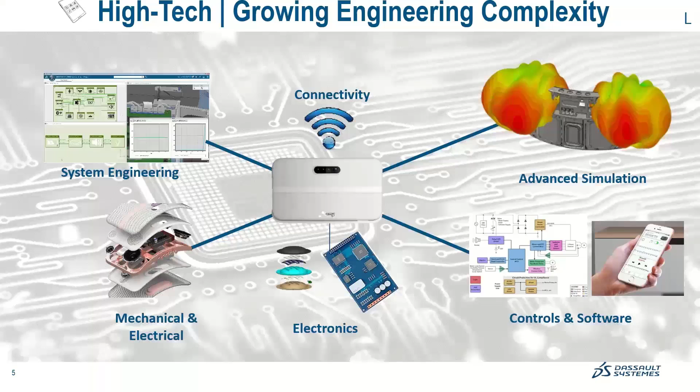Lou worked with the SolidWorks and mechanical guys over the years, and advanced simulation. The high tech is in engineering, the complexity, the model-based engineering and system engineering, systems of systems, making sure that you have all your I's dotted and your T's crossed when it comes to all these different disparate processes. You really need to have your finger on the control and be able to create these digital twins and do this simulation virtually instead of in the lab. You could be there simulating and changing one variable at a time.

And with that said, there's a whole process when it comes to product development, engineering, multidiscipline, governance, product requirements. I mean, who sets the product requirements? Well, typically marketing, sales. It could be a product requirement from the government that says, okay, you have to have this box, it has to do that, it has to fit on this airframe. It could be a commercial design, industrial concept, intellectual property that you're putting into a chip and creating a new product.

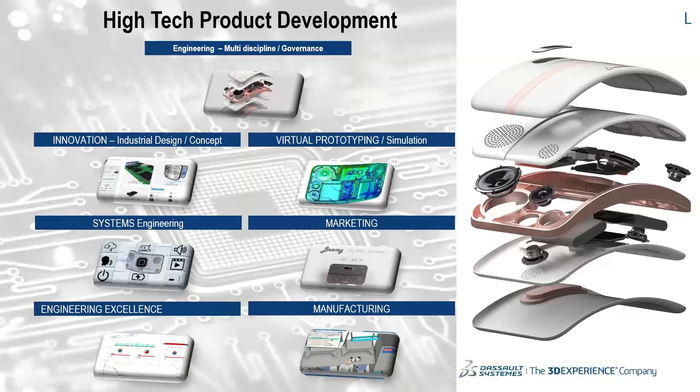Basically, creating something new like this. This is a concept product that Dassault came up with, this Beamy. It's really just a cool Bluetooth speaker that kind of sits up by itself, and it integrates the full plethora of mechanical system, software, advanced packaging, because some of these packages and printed circuit boards may be curved or rounded. Then following that all the way in through manufacturing and making sure that this is producible, being able to control the manufacturing machines, the industrial equipment, and with being able to produce this, whether it's onshore or offshore. That ability to collaborate with those guys is really, really super important.

This is kind of a view, if you will, of the disparate processes and software that are out there today. I mean, this is just real life. You've got Microsoft Office, you've got SolidWorks for CAD. You might have Cadence, you might have Altium, Mentor, any one of those ECAD systems there. And how do you manage the projects? Use Jira. We use Slack at one of the companies that I work for. So just an interesting view of this.

And working for 20 years with Cadence, I can say I saw this over and over and over again. I also worked at Mentor for 6 years as well. So same thing, right, Lou?

Very well articulated, Ed. This is what we typically see at our customers - a real interesting snapshot when you see all these disparate systems. When we talk to the IT department and the IT heads, they just shake their heads and say, is there a better way?

That's where we introduce the 3D experience platform to consolidate all of this without losing it. A lot of companies have invested a lot of money in these platforms and products, and over time they need to improve. So we've created the ability, through the 3D experience platform, which is truly a platform that allows you to use your existing products today and then migrate over time as the company matures and grows into the 3D experience tool.

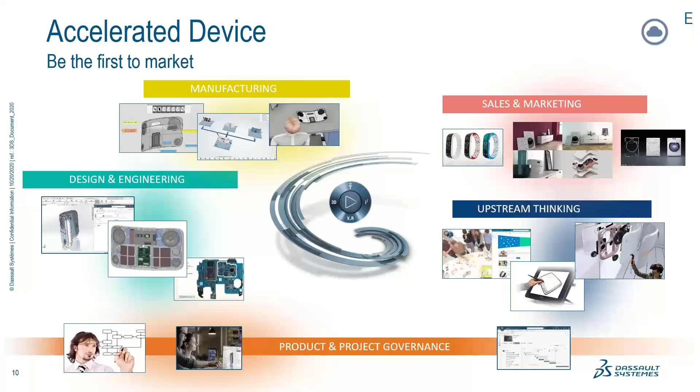Yeah, that's exciting. The manufacturing link to that, Lou. The other thing that's really cool is not only are they segmented that way, but if there's a specific industry, Dassault and EMA really focus on specific industries, so there's solution and product dashboards put together for specific industries. You can think of that as staying on task with what you're doing for that specific industry.

Look at the 3D Experience as more of a strategic way of doing things, because it's a very holistic view. We're not looking at individual tools, we call them authoring tools. It's really about using those authoring tools' data over and over again. That's what we're looking at, a holistic view.

It's nice that it's ECAD design authoring tools agnostic, or even MCAD agnostic too, right Lou? Because you've got Creo, you've got Solidworks, you've got whatever. As we go through this webinar, we'll show you some of the in-depth design tools and some of the tools that cross over from other suppliers.

I'm glad you mentioned that, Lou. The whole thing here is that it's a unified platform, and we're looking at a platform approach, taking a model-based engineering approach to the design.

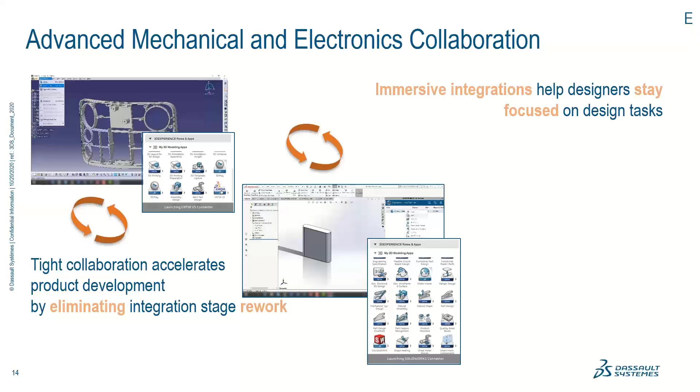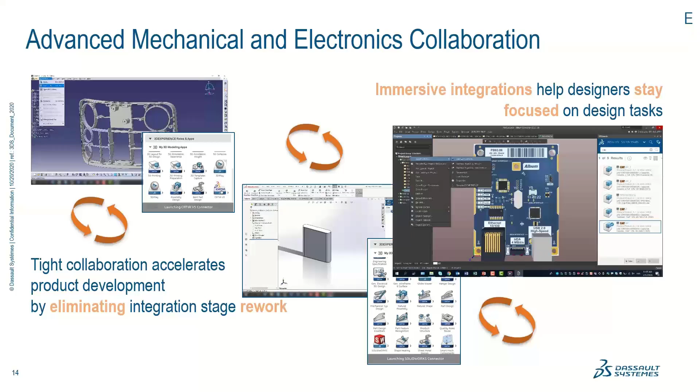For this example, I'm going to walk through the day in the life of a product being upgraded, from the top level where the product manager launches a change order, and we'll walk through how the 3D experience works. First, I'll show you the cadence connector that allows us to show cadence. Then we'll talk about component libraries, very important, and show multiple products since most companies have multiple ECAD and MCAD products. The first solution I'll show is the 3D experience working with cadence, then the same scenario working with Altium data.

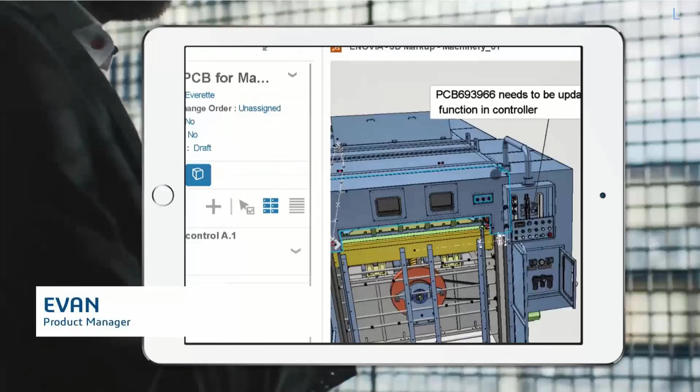So now we're going to talk with Evan, a quintessential product manager. Evan realizes through some information that they need to change one of the printed circuit boards inside one of the systems. So Evan creates a change order, sends some notes over about this printed circuit board sitting within the system on top of the 3D experience. He sends a change action to Sarah, our cadence design engineer, telling her that a change needs to take place in the design.

Taking a very high level look at this: she's notified of the change. She goes to the 3D experience platform, which is highly integrated into the cadence design system. She opens up the project, and from there she can bring the project into cadence. She looks at the requirements, and now she says load the particular job.

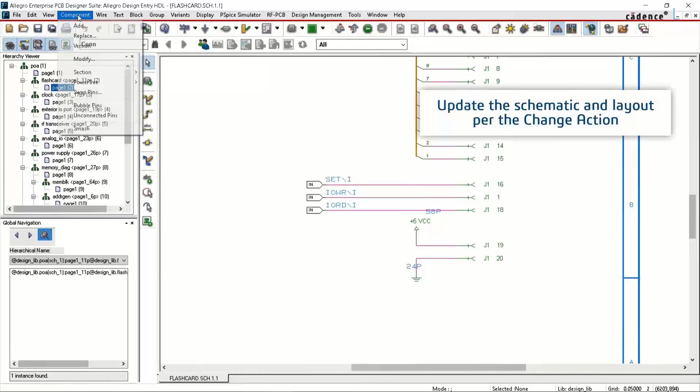So she loads the job for that particular machine and sees there's a change order against it from the product manager. She reads through the project changes, looks at the printed circuit board, and looks at the work. So what she does is open up the design, update the schematic, and make the changes.

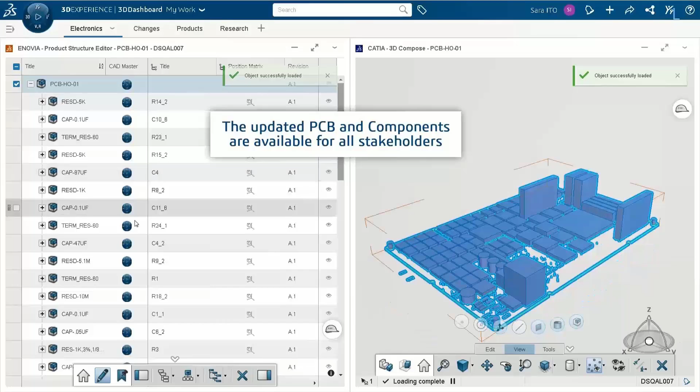When she makes the changes, she saves it back into the 3D experience platform. But when she saves it back, it checks to make sure the design meets the design intent, and that all of the parts have been released. She's putting the parts in and checking if the parts have been released, looking at the changes, then she releases the product, changes the process, and resets the product life cycle, releasing the parts. The system makes sure that all the parts Sara put into the product meet the requirements and have been through workflow.

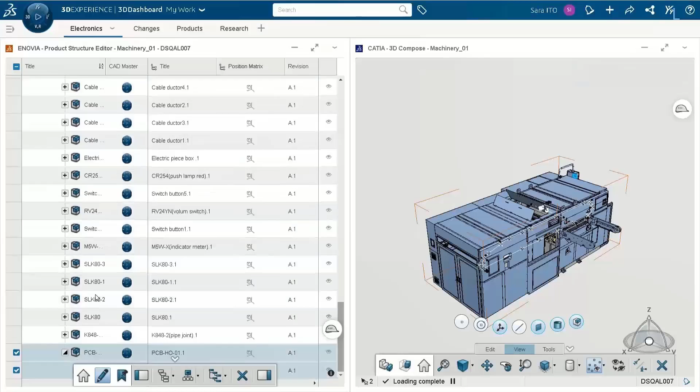So now she's released the product, bringing it back up for the stakeholders to take a look at. You'll see now an element that says it's a Cadence Allegro design element, and basically a virtual image of the printed circuit board on the 3D experience platform. She does a change action to release it, it walks through workflow, and then it gets automatically replaced into the top level assembly.

So really, it allows full immersion of the Allegro product, easy search and access to open the design projects from the 3D experience, and automatic generation of tailored manufacturing outputs. It will automatically generate all of your Gerbers and place them into the archives, and also change all of the notations on the documents and save them to the platform for distribution to your supply chain. It can notify your supply chain that you've made changes, with complete control through all of the different uses of this. This works with almost all brands of ECAD solutions.

So in this particular section, I showed you how easy it is to collaborate, store your files, bring them back down, and make a change at a project level. Now let's take a look at the libraries. We're going to use Altium for the libraries so that we can show that we're multidiscipline based.

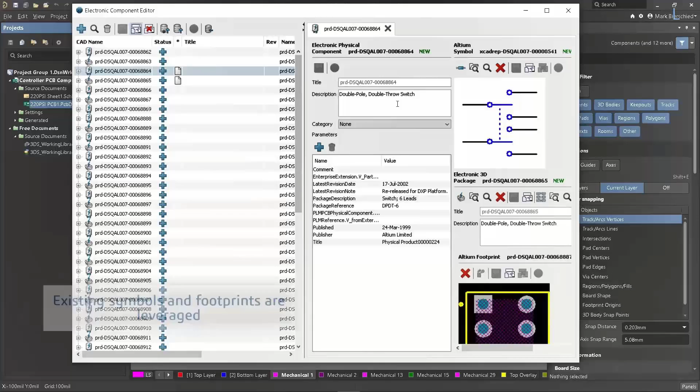So here you're going to see we're going to bring up the Altium component editor, and from the component editor you're going to see the components are created.

It brings up a template for us, and within this template we have all of the components: the schematic footprint, the 3D element, all of the design features and elements necessary, and all of the 3D parameters.

The 3D Experience platform is simulation based, so we can also put in simulation parameters and the values of the components. This is a holistic place to put in all of your part information that's going to be used in your design.

You can put in the schematic and it'll automatically create a 3D package. You can reuse your existing libraries, and cross libraries between different packages so that you have one footprint, one set, unique capability.

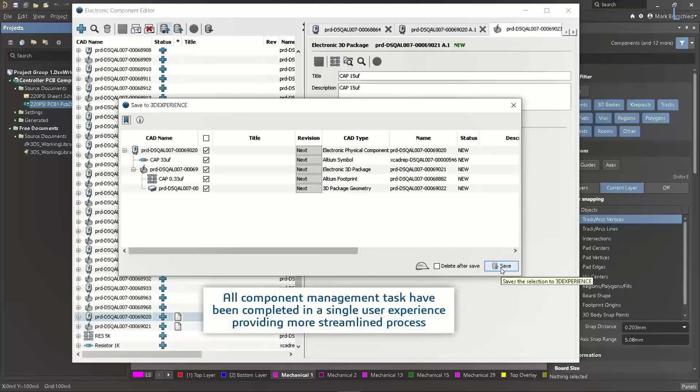What's really unique about the system is it allows you to have one product structure with all of your design elements, whether mechanical, physical, or software, and anything beyond. It's a unique capability for maintaining all of your libraries.

We also have capabilities to do the next generation, where we can actually manage obsolescence, RoHS, and REACH. We have those types of capabilities in the system.

So here I'm going to hand this over to Ed, and this is where we start talking about real physical design. You've created your design, and now we really want to take a look at this—the collaboration between the ECAD and the MCAD.

In the scenarios here, we're going to use two different ways. If you use the interfaces I just showed you, we can take it directly from the platform. Depending on what ECAD package you have, we also maintain the ability to read IDF ProStep data. I'll have Ed walk you through that.

Thanks, Lou. The thing I thought was really cool about the couple of videos—I'm an ECAD guy for many years—is that ECO process, maintaining the versions and control of that. In the first video, it was all done inside of Cadence.

You could see from the project manager you were actually going in and launching and checking out the dashboard from the actual Cadence tool. They're integrated into that process, and the same goes for the second video in Altium.

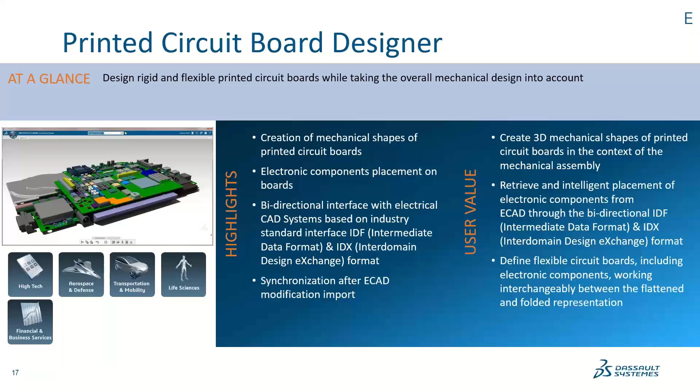That's just unbelievable tech. Absolutely—smaller, faster, more technology encompassing, smarter technology. You can make it smarter because you can make it smaller and do all these different things.

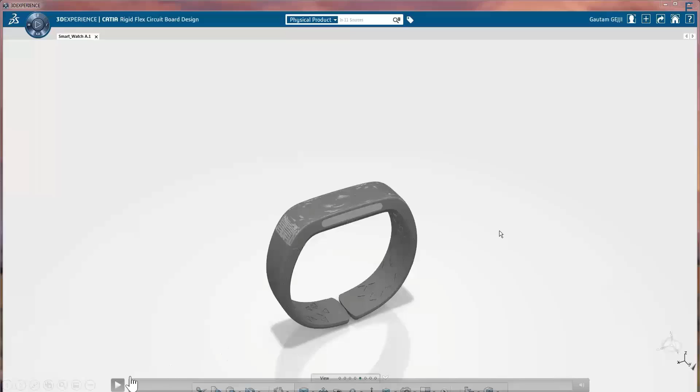In this video, it's going to show how we can package and create the flexible circuits that are associated with connecting to the rigid circuit boards, whether they're in a box that goes on an airplane or into a watch.

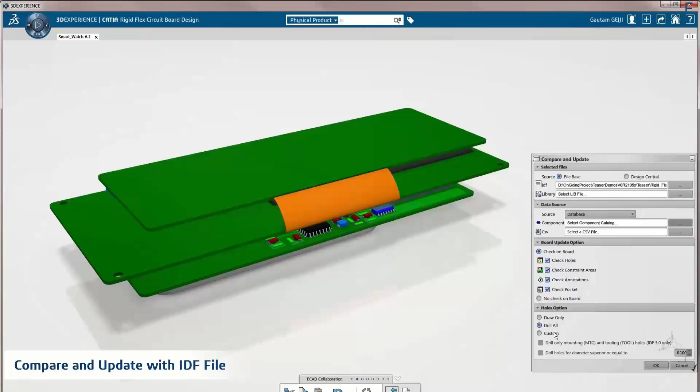It's as easy as selecting the parameters, taking that information from the ECAD as IDF, transferring it over, setting up a baseline, and then defining what comes over, whether parts come over, etch, any variety of communication between the ECAD and MCAD process.

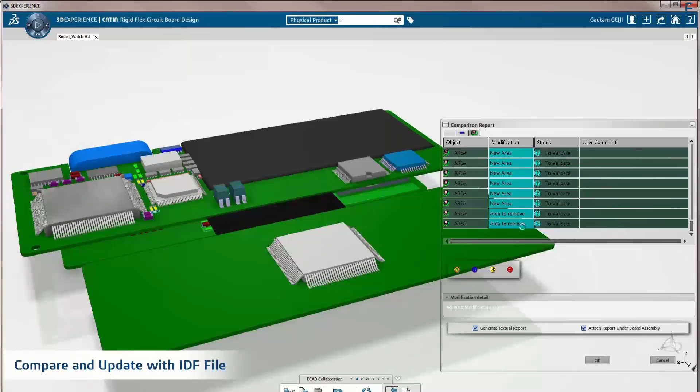So it's very easy to run what-if scenarios on, what if I bend it this way? How does that affect my Bluetooth, for instance? How is that going to communicate with my headphones or whatever?

And now, how do I actually connect these boards together? Do I use a connector? No, connectors are big and bulky. I want to use a flex circuit.

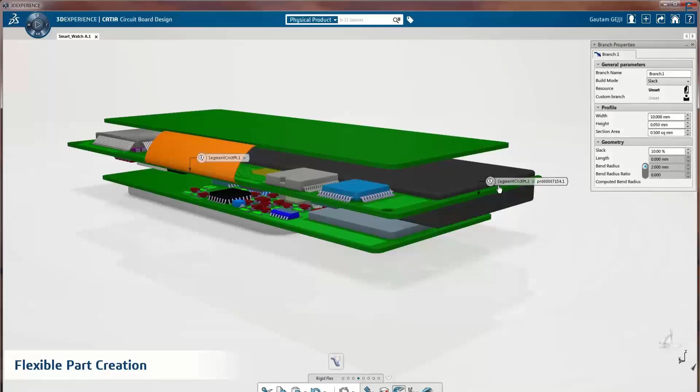Or rigid flex circuit, and I select one edge of the board, the other edge of the board, and I can even look at the stack-ups in between and say, okay, these connections are on this layer and that layer, and then define how I want those things to be, whether I want it to be minimum distance, but I might have to do some.

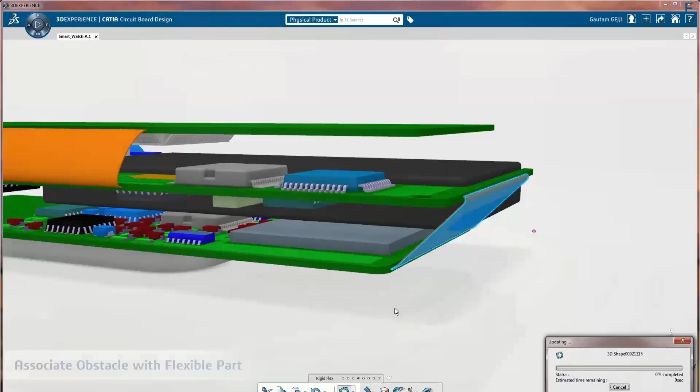Well, there's an issue, there's interference. So I can set inside of CATIA the parameters such that, okay, I can have a big bulky one like that, or I can say, hey, use that interference that I'm having as a base and just avoid that. So there's an avoidance in there. There's checking, and when you go back and forth on either side, there's checking everywhere.

And this is of course how you'd want to see it, for a manufacturing process where it's unfolded, and then back into the actual watch itself.

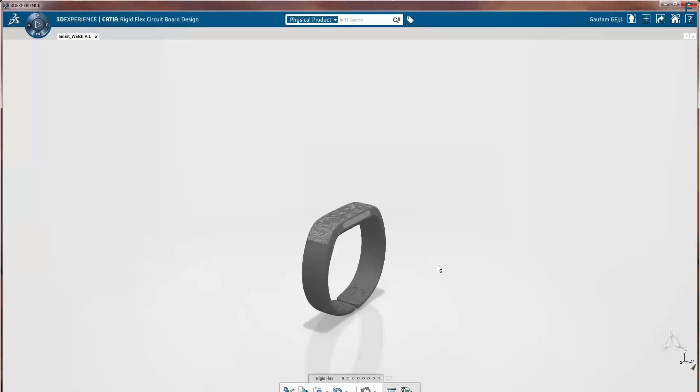But we vetted this process, whether it's for smartwatches, iPhones, or any other type of consumer product that's out there today. I call it my origami product.

Yeah, exactly, Lou. If you have a tablet PC or a Chromebook, you gotta pack all this stuff in there because you need a hard drive, you need some way to get the graphics out. You've got all these interfaces and other things. You've got a power circuit.

All these things come over, and being able to take and parameterize and create constraint areas and be able to check for these interferences like we had in the smartwatch section. It's the same thing on a laptop or a notebook or anything else.

You want to have that obstacle avoidance, and having a robust ECAD system that can pass that information back and forth is critically important. And then if you harness the power of the platform, you can actually figure out how many times you can fold and unfold it before you do damage. That type of stuff is just amazing technology that's used.

And if you ever want to take apart something, try to take apart a camera. They are just amazing electronics packed into a camera. Every time I open one up, or every time I see a design from a camera manufacturer, I am just in awe of how they take this technology to the next level.

Certainly you're going to have the same kind of thing, and this is exactly what they did. It's like, okay, somebody wants a small thing, fitting it into your Android or Apple-based phone. You want it to be a certain size, you want it to be a certain quality, and all that's got to fit into an enclosure.

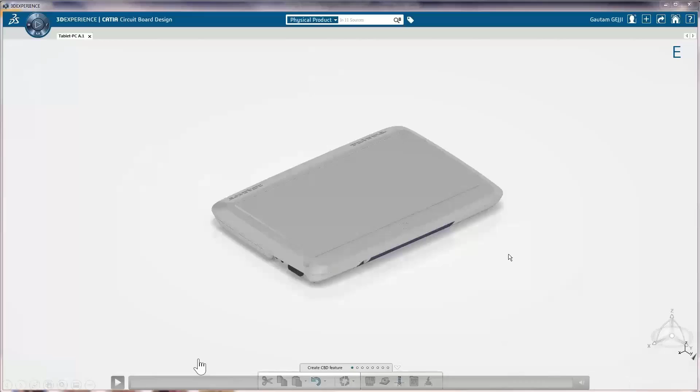And being able to do the what-ifs that are associated with that, in creating those constraint areas, like you'll see in this example here. It's the same kind of idea.

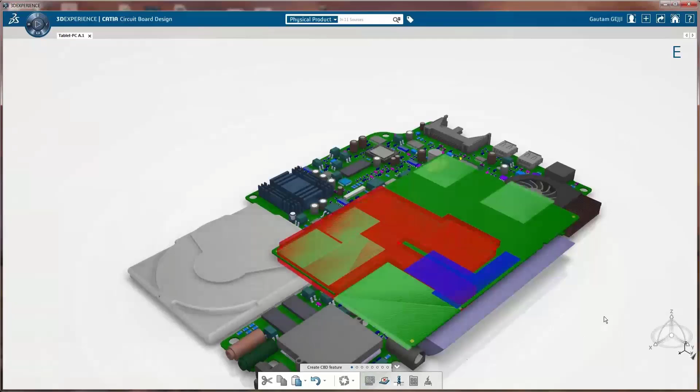This is a CATIA version of that, where you want to have keep-outs, or certain components can't be over a certain height in different areas, or can't be there at all. This information is communicated back and forth with IDF, in any standard EDA tool, to the mechanical tool.

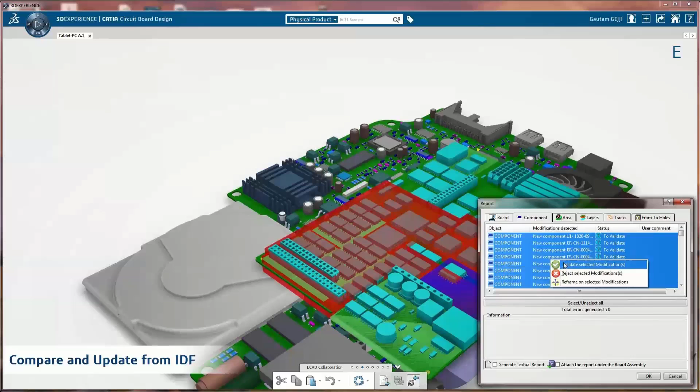This is kind of the next level when it comes to being able to integrate the etch, the vias, components, different assemblies, different enclosures, even the red areas where, of course, the components were too high, so we'd have to do some modification there. And here's the flex circuit that we forgot about and needed to put in at the last moment.

So it goes from the connector here, and there'll be a little, in fact maybe this is even the camera. Yeah, this is the camera portion, there's a part that was, where we wanted to have the camera, and we couldn't move it around because of the proximity that it needed to be with the other IC.

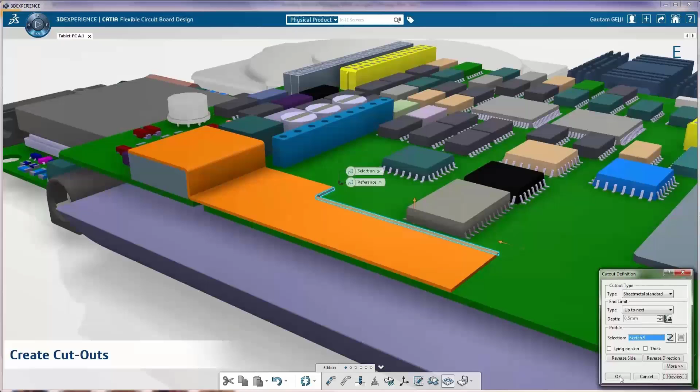So we cut a little bit out of the flexible Kapton that's associated with the flex circuit, and said, okay, hey, let's move our camera up a bit. It's small enough where we'll fit in this, and do the what-ifs.

And that was an important thing that you mentioned, Lou, is this capability is going to allow you to do more what-ifs. What if I move this here?

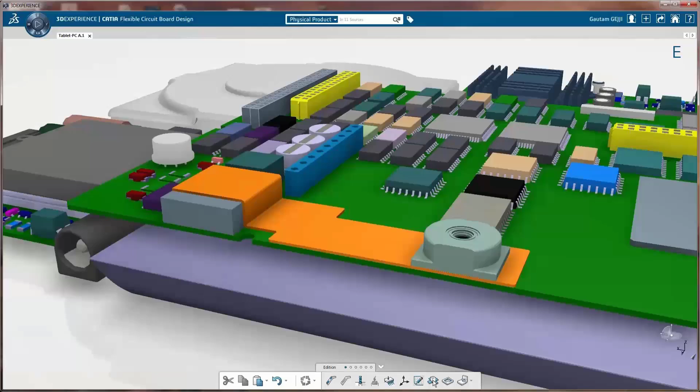What if I put it on the other side of the board, giving you the capability of seeing if this is going to fit, seeing if this will work, be more optimum. It turns out that no good electrical product doesn't have a package.

So we've kind of showed you how we can handle rigid boards, rigid stack-up boards. Traditional software, non-platform based type software can handle a single card entity back and forth. Now it gets more complicated, as Ed showed you, when we're doing origami designs, where we have maybe a single printed circuit board that's folded up, or we have the rigid type that has multiple pieces, multiple printed circuit boards, and then on top of it has mechanical features, such as in that particular case, disk drives and cameras, that had to fit in a housing.

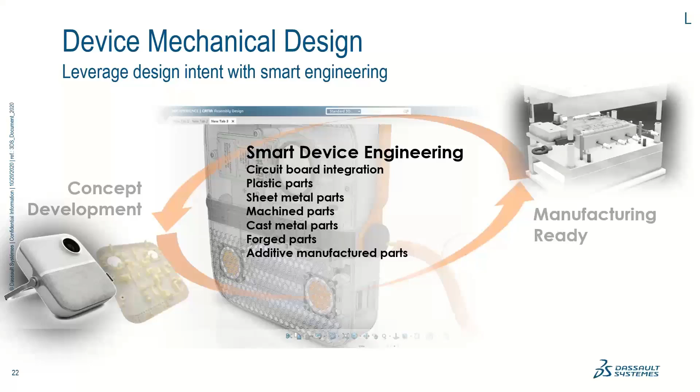One of the things that's really important is you need to build the housing. Because of being from the SolidWorks CATIA world, we're going to show you some technology that's going to really make building housings much easier. We have a product, and we're going to kind of walk through a video on it. It's called Product Enclosure Engineer.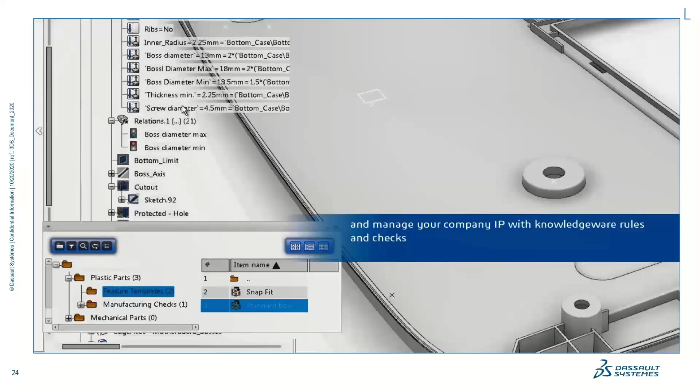What it allows you to do is really define the engineering that you're going to do on your mechanical design, and have it work very succinctly with your electronics design. It's also going to allow you to reuse features and technology that you currently use, because you need to keep consistency in the manufacturing.

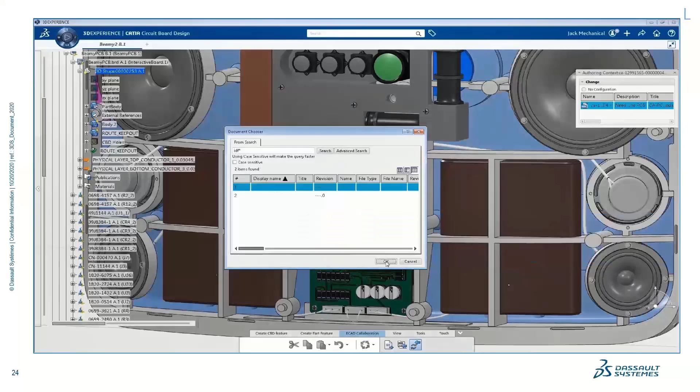So we have a particular type of IP, or a typical way you do things with ribs or bosses and stuff like that. There are templates available in here, and it allows you to do different types of technology, because at the end of the day, you need to be able to produce and to actually plastic mold.

Now here, we're going to take the printed circuit board, bring it into that plastic frame, and then from here, we're going to be able to actually do measure-ups and to make sure that there's no collisions and that everything can kind of go back together.

Because if you do make a change, you don't want to have those collisions. So as you're designing your printed circuit board, if you need to do an outline change, or you actually change a component, you'll never know what the height or what the parameters are that you may have, or if you've moved a part too close to something.

So we can actually bring that back in again and take a look at it at the assembly level, really understand what your impact of your changes is. And then these tools are great, because you can't produce a real product unless it really takes electronics, mechanical, and software together.

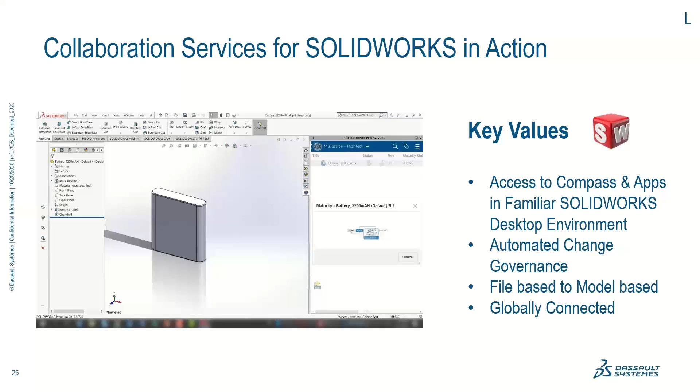So right now, we're talking about the mechanical side. Basically, what we want to talk about is the integration with SolidWorks. A lot of companies that use Cadence products also use SolidWorks or a third party, and I'll show you some third party ones. But the platform is great, because it allows us to integrate into the platform, no matter whose mechanical CAD you're using or whose electrical CAD you're using.

So let's move to the video here. This video is very interesting, and I'll just kind of walk you through it—it's going to be very straightforward. What we're going to see here is any activity starts with a change process. Something needs to be fixed or something needs to be done.

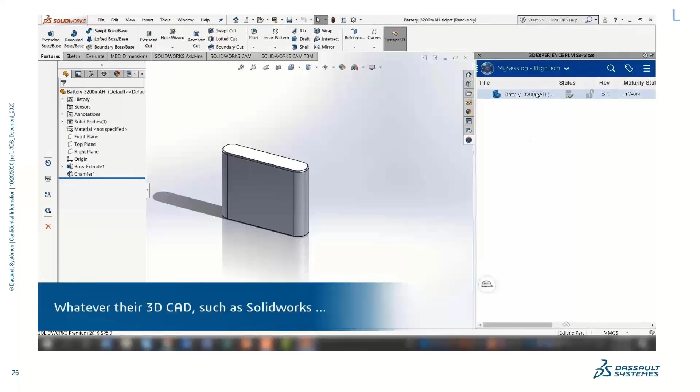So here, what we found out is that the battery needs to be changed in size. So it's very easy—they're going to add some more cells. So the SolidWorks engineer goes in and changes the battery in this product. Well, this product is made up of multiple users and multiple pieces, so the frame of this particular product, this is again a Beamy design, was designed in CATIA. So now we need to put that new battery in there.

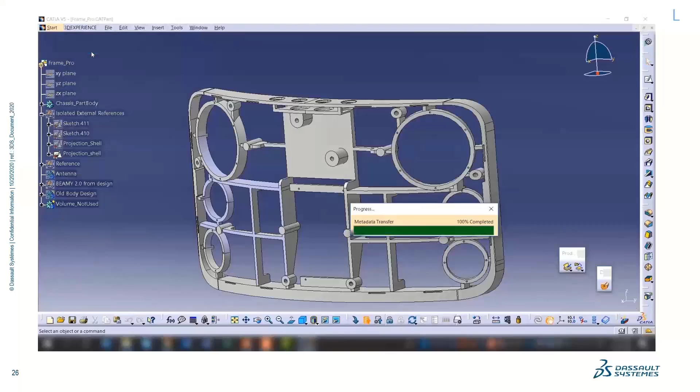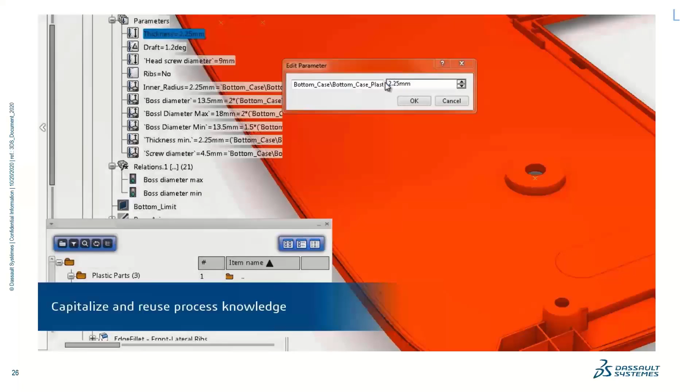So basically, the change management knew that we made a change into a mechanical item that's going to impact the mechanical design, so it sends a change notification in here. And really, what this tool allows you to do—we call it mastering the design complexity—is it allows us to really go into a design and integrate the true mechatronic solution, where we can integrate both mechanical and electrical systems. You can see that we're going to be doing different pin designs for snap-in features.

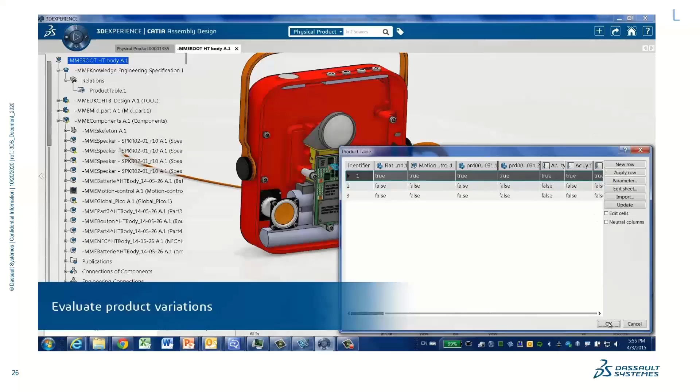And then the thing that's interesting is we can actually put the printed circuit board in there. And what's really, really interesting is we can look at different variants.

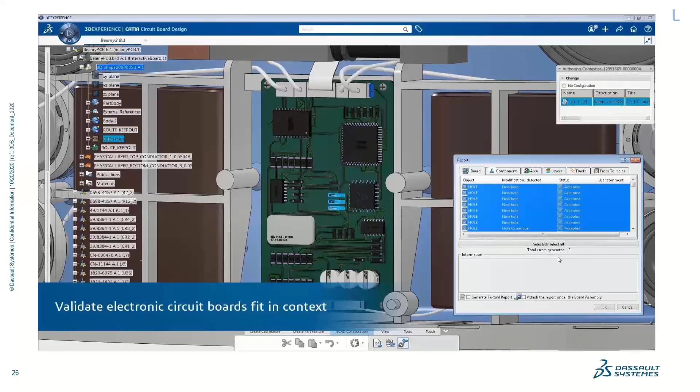So if we need to make different variants of it so that we can make sure everything fits together nicely, we can do different variants. Again, we can do electronic board fit up, and then the other technology as necessary into the product.

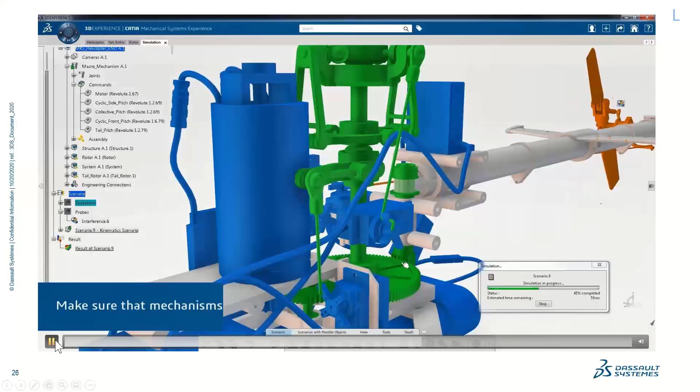So what we have is the ability to look at different technologies that you want to use, and then we're going to show you what we call generative engineering, where we're seeing simulation and what-if scenarios, and generative engineering, where we need to make something quicker, lighter, and we set the parameters and let the software do it.

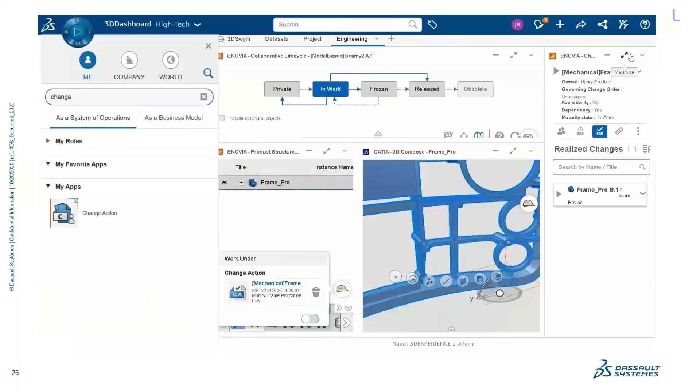And then what you're seeing is mold setup and mechatronics with kinematics. This is all running on the platform based on these designs that are coming into the product. And really, what you can see is we can do topology optimization and then refinement. These are tools that are done on the mechanical side, but they interact with the electronics, so we look at things as a product that includes electronics, mechanical, and software.

Here we're walking through the mechanisms to do change. We're doing change management to the frame, changing its status, and releasing the product into a release state. We can do that for all of the different items and processes going through, so we have full control and full traceability of the status of every design item and everything you're doing.

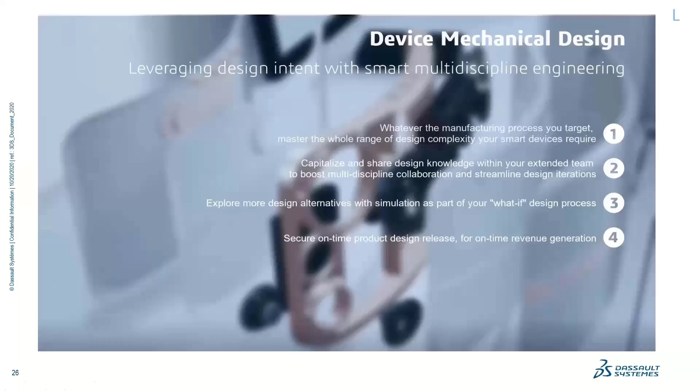Now I'm going to show you something, because not all CAD companies use Dassault products. So here we're going to launch it. Now you're seeing the product, and this is a combination of different products. It's got ECAD, MCAD, and software in it.

So again, we're going to launch this product and run it through. It's on the 3D Experience platform. It's all put together, the assembly's put together, and we're walking through it.

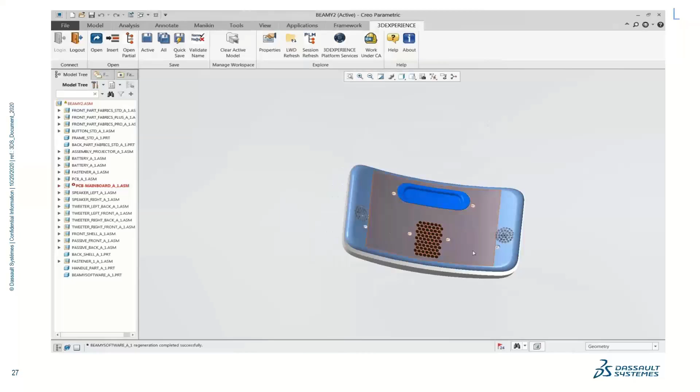And now what you're seeing is we're looking through it and say, I need to make a change to this back plate. Well, the back plate happened to be designed in Creo. So what we do is at the product, you'll see that 3D Experience will launch Creo, allow you to bring the product into Creo, and make the appropriate changes.

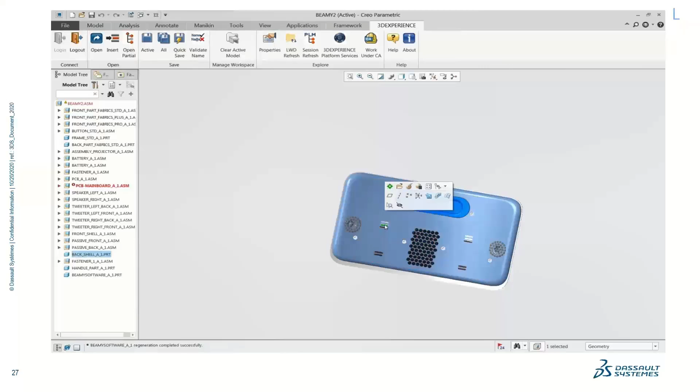Now here we're going to make a change saying we don't have enough air, we need to change the airflow in the system. So our simulation said we need to make some changes, so we're making changes in the airflow. We're using the native design tool, or what we call the authoring tool, to make the changes inside of it.

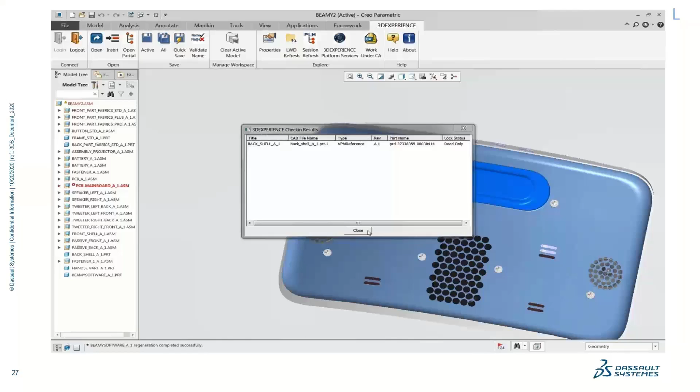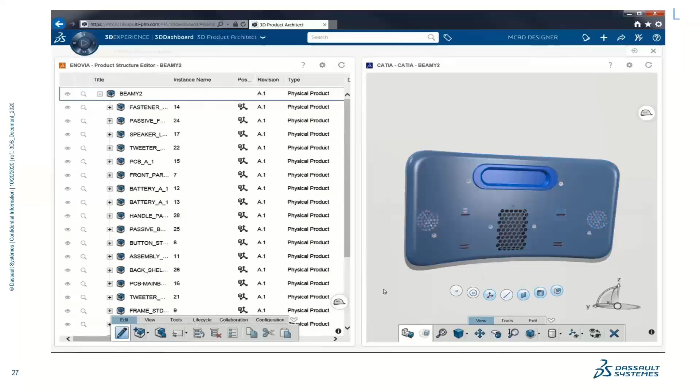And then once we're done, we're going to save it back to the platform, and it's going to be put back in place. So basically what we're showing here is the ability to take multi-CAD from multiple vendors and use them in your final product assembly, and author them as necessary. We don't author the particular multi-CAD product inside the platform, but you'll see it updates the bill of materials, all of the information and reference documents, and re-renders it so we can see the new changes we've done.

This is really the power of a platform. We're not dependent on any particular MCAD user. We can do this with most MCAD systems and most ECAD systems, so it's very powerful when you're in an environment with multi-CAD and multi-users, and it's invaluable when you're doing smart product design, because not every tool will work, or you have tools you want to cross-use within the company.

And you're working together, collaborating, maybe even doing it concurrently, at the same time, and the platform enables that process, not only from a mechanical standpoint, but now including the hooks to manufacturing, and as we're going to show in a second, the software part of the process as well.

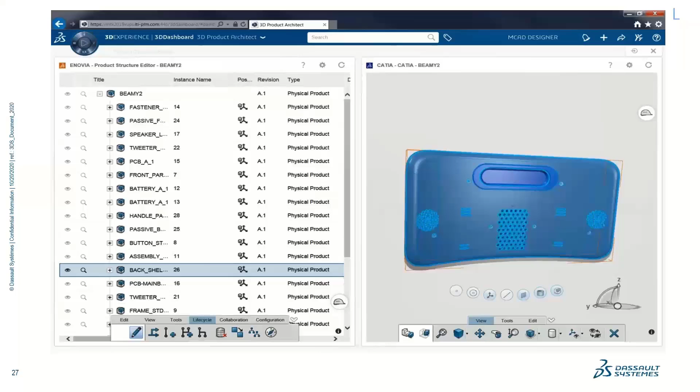What we found, and we kind of outlined this on the last webinar we did, is that with the unfortunate circumstances of the pandemic, the platform has been invaluable, because today people can stay at their homes and work like they're in their office, because the technology is cloud-based and highly secure, and you can be working together on products no matter where you are in the globe. This is not a site design product, unless you happen to need it on premise for security reasons, but it's been invaluable to companies.

Think about working on mechatronics or high-tech, smart devices. You may be working with multiple design people, someone doing your RF simulation, someone doing all your different pieces. Using the platform approach allows multiple distributed engineering to take place. It's unbelievable how powerful it is.

Now I'm going to talk about my favorite subject of all time: software. Everything in the world today has software, and it has multiple layers of software. We have software inside the cloud, we have software inside the product that we may call firmware, and then we have applications that run on top of this, plus things you'd call paid applications.

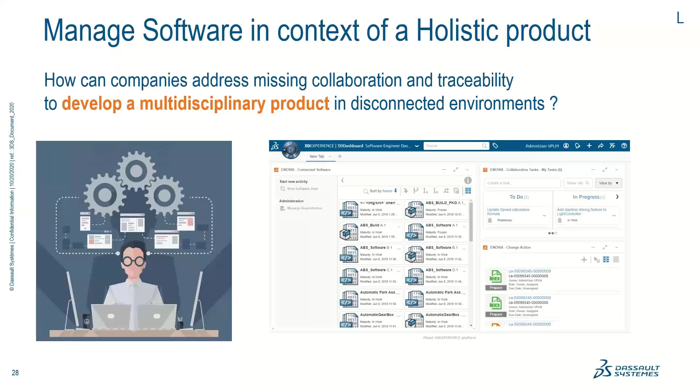So when you look at building a smart product, how do you know how it's shipped? How do you know what the snapshot is? It's hard enough today when you're building mechanical and electrical and marrying them together to know what the bill of material is. Now that you have software-configured products where your hardware and mechanical have been united, how do you handle that? We'll walk through it quickly, but I'll show you that we handle it the same way we handle the ECAD and the MCAD.

Basically, we can connect to your repositories and actually take a snapshot. One of the things we do that's very different is we typically connect to a product through either GitHub or a Git library. We also see a few other technologies.

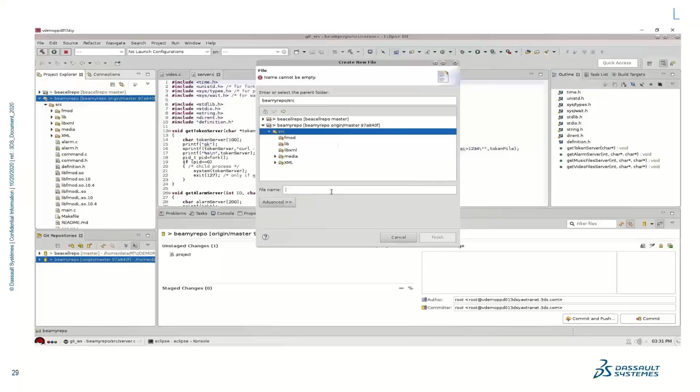One thing we've learned working with software people is that they have iterations that they do, and they like to use their own products. They like to have their own little nest of how they build the product daily, how they're doing their designs daily, and how they're doing their check-ins and check-outs using the tools that they use. But those tools never typically align to the processes for electrical and mechanical.

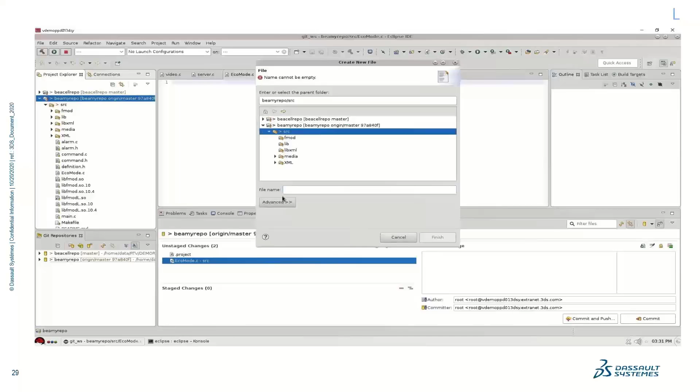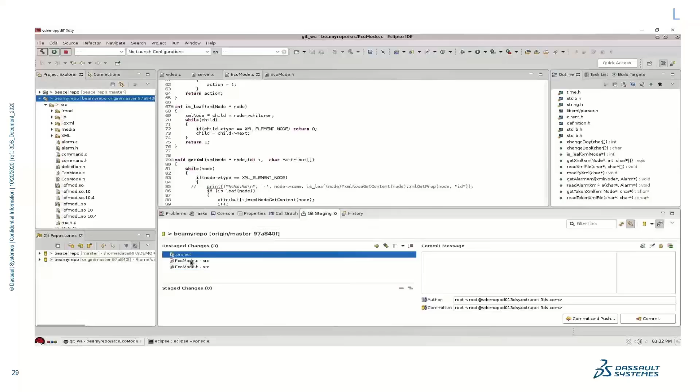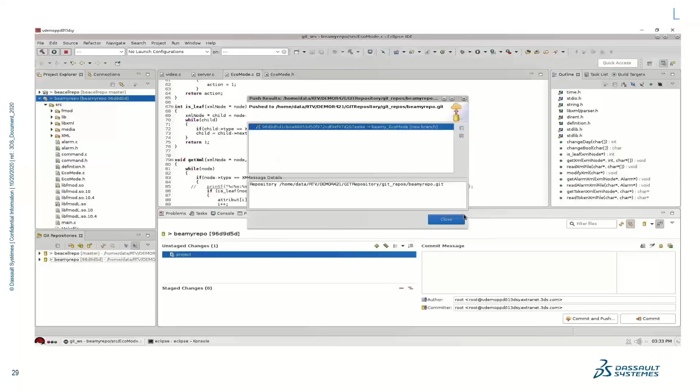What you're seeing here is the ability to look at all of the repository information, no matter if it's the source code, the compiled code, all the runtime, the libraries, even the compilers. When you branch, you can take a snapshot, put that into the 3D Experience platform, and take a look at it. You'll have a complete overview of how you built that product and what it is at that time of release, connected to your mechanical and electrical build at the exact same time.

So what we do is sit on top of the repositories the way the software guys do it, but align it to the product when it's being released. At any given time, you can take different snapshots of the product, of the software. We found that's the way most people operate - the software engineers do their thing, they run around and get things done.

As we get more complicated and sophisticated in our designs, we can actually drive software through requirements management and really see the progression of software. So it's not just a matter of taking a snapshot of the picture and building a bill of material item - we can actually start triggering events to take place. You'll find that today in smart products, software is unbelievably complex to herd the cats, is the best way to put it, because you have so many different departments now.

But at the end of the day, when you're shipping or producing a product, you need to know the mechanical vintage, the electronics vintage, and the software components and vintage, and where and how they were produced. That's what the 3D Experience platform allows you to bring to the table.

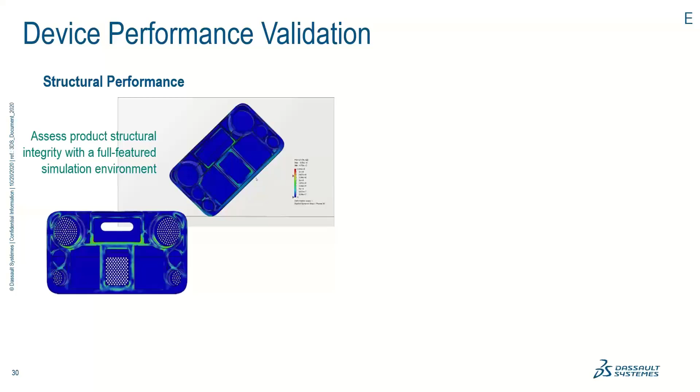That may be a future webinar we do on the technology, but we can do structural analysis, we can do packaging - one of the things we do a lot is packaging analysis. You build these great products, put them together, get the mechanical bolted, everything under control, then you put them in a box on a truck or a container, and they drop.

How do you know that your box is going to perform? We have simulation software that can produce drop testing and such. That's part of the 3D Experience platform. If there's any questions, feel free to put them up on there.

Between the software, as we went through there were these workflows or process steps that would pop up, and the platform allows you to have the dashboard, but inside that dashboard you can customize the workflows or process flows, and set steps or requirements at certain points in the process. If you had a critical design review or preliminary design review and people needed to be called in, they get a notification on their dashboard, on site or remotely, and be able to keep abreast of where the project is. Management can have that view and not be looking over your shoulder all the time.